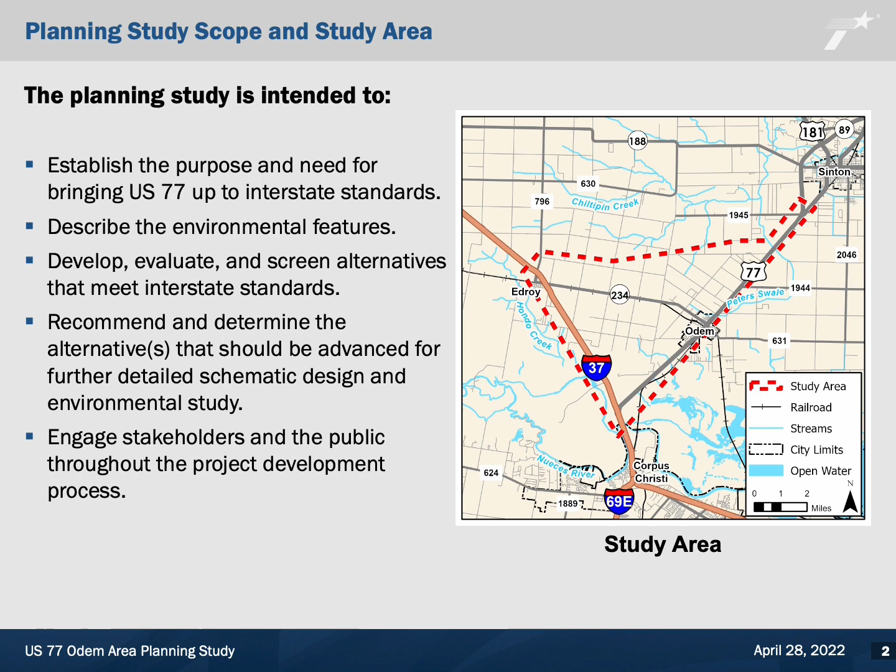You may notice the study area depicted on this slide is fairly large. This is intended to provide sufficient coverage to accommodate the range of alternatives that may be developed to bring US 77 up to interstate standards.

You may be asking, why do US 77 and other highways need to be upgraded to interstate standards? The I-69 system was established through a series of transportation legislation signed into law beginning in 1991. The I-69 system will ultimately extend through Texas up to Michigan, thereby providing a continuous interstate corridor connecting Mexico, the United States, and Canada.

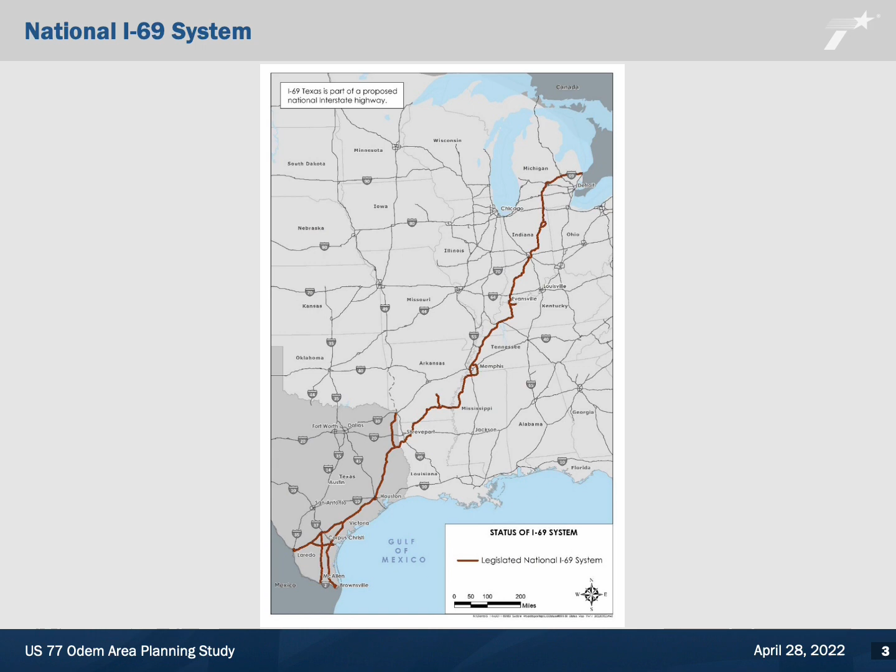The I-69 system in Texas will result in a variety of benefits. It will enhance safety and traffic operations and facilitate the efficient movement of freight. It will address emergency evacuation needs and serve both rural and urban communities. I-69 will also accommodate growth and economic development and provide improved connectivity to multimodal facilities, ports, and border crossings.

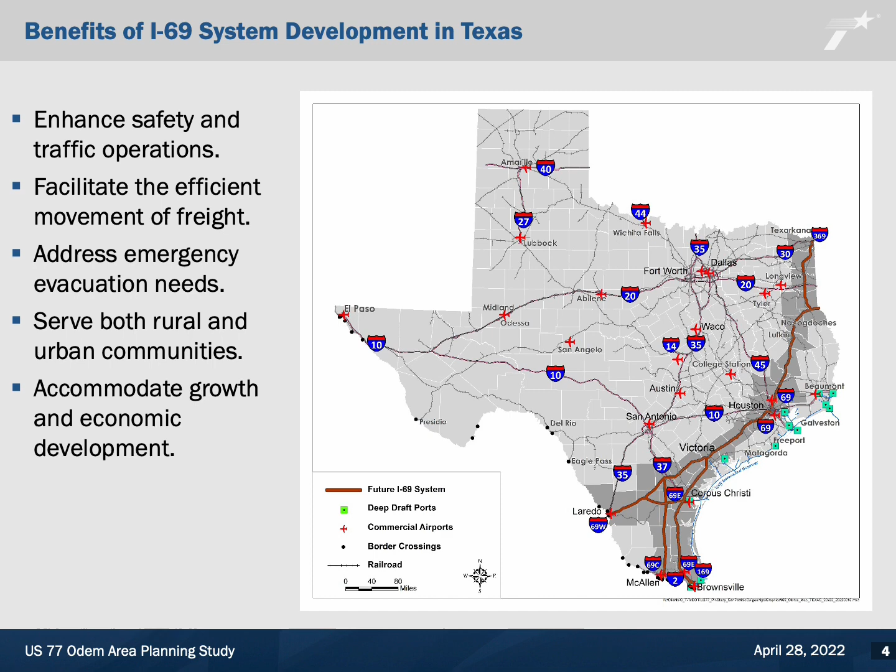US 77 in the Odem area does not meet interstate standards. The US 77 roadway characteristics within Odem include 10 intersections that have stop signs from side streets that allow for turning onto US 77. There are also 3 signalized intersections, 2 at-grade rail crossings, a school zone that drops the speed to 25 miles per hour when school is in session, and a posted speed limit of 35 miles per hour through town.

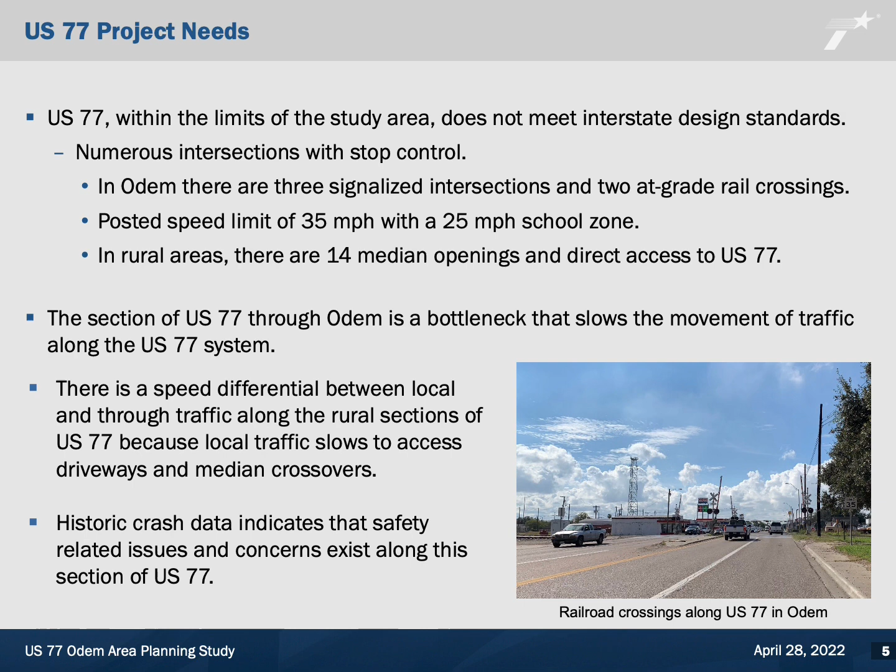The rural sections of US 77 outside of Odem include 11 intersections with stop signs from side streets that turn onto US 77. There are also 14 median openings, some of which have left turn lanes, which allow traffic to cross US 77. In addition, this section of US 77 is a bottleneck, and there is a speed differential between the local and through traffic along the rural sections because of the driveways and median crossovers. Historic crash data indicates that safety-related issues and concerns exist along this section of US 77.

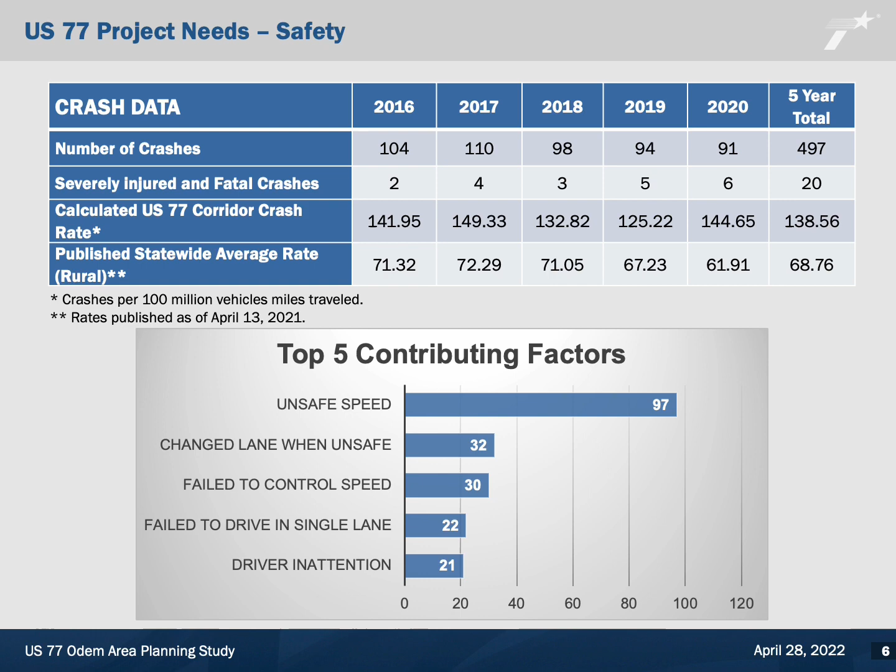Bringing US 77 up to interstate standards will include design and operational improvements that will maximize the opportunity for motorists to recover from driver error and react to unforeseen hazards. It will also reduce the mix of slower local traffic with higher speed through traffic.

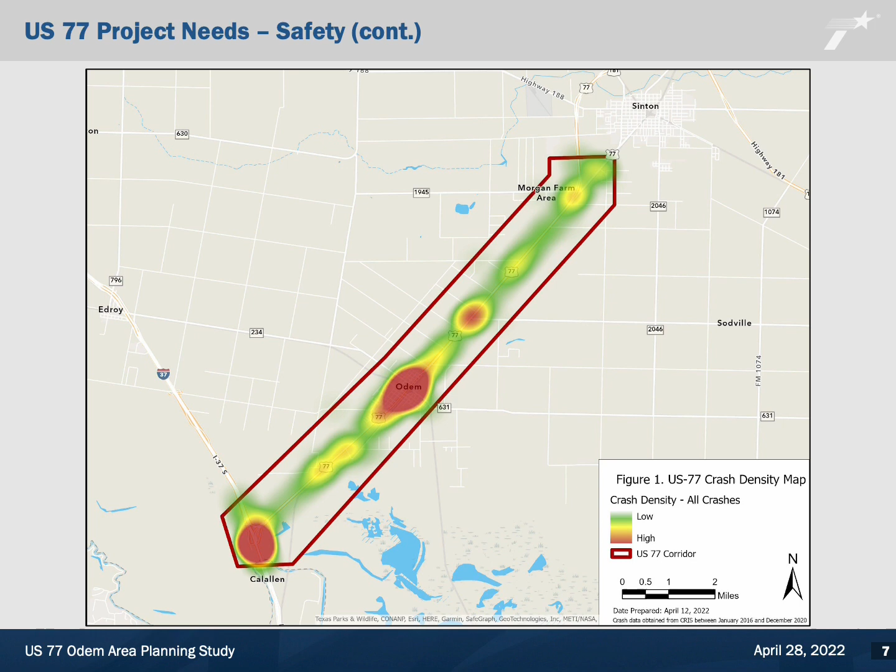In addition to safety, mobility, access, and connectivity are also needs for US 77 in this area. The annual average daily traffic for this section along US 77 ranged between 19,631 and 22,745 between 2016 and 2020. Of that traffic, approximately 13% were large trucks.

The average speed in the area includes a bottleneck in Odem where the average speed drops to below 30 miles per hour to accommodate the in-town traffic. The purpose of upgrading this corridor is to improve through and local traffic mobility while enhancing access and connectivity to serve Odem and the surrounding rural community.

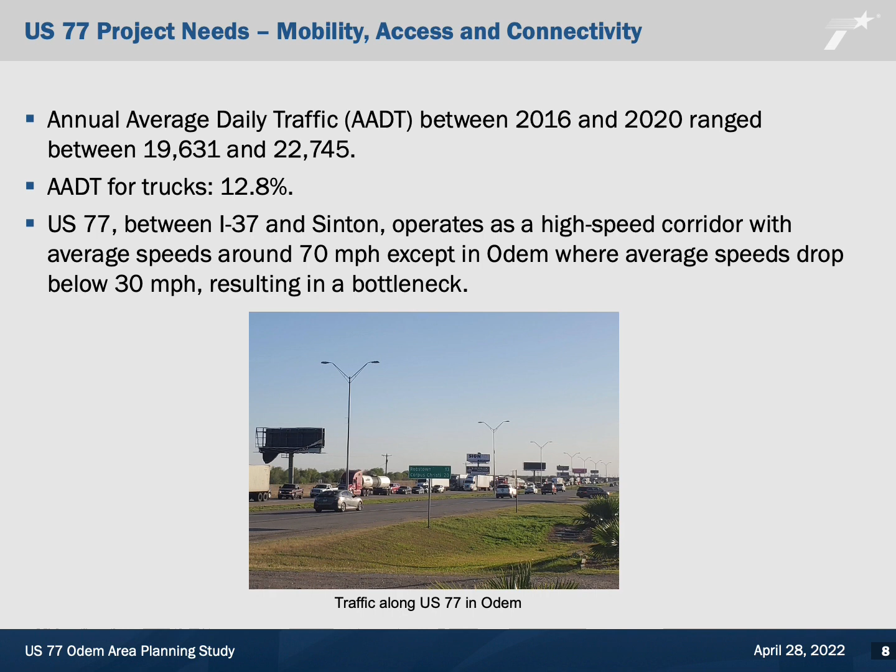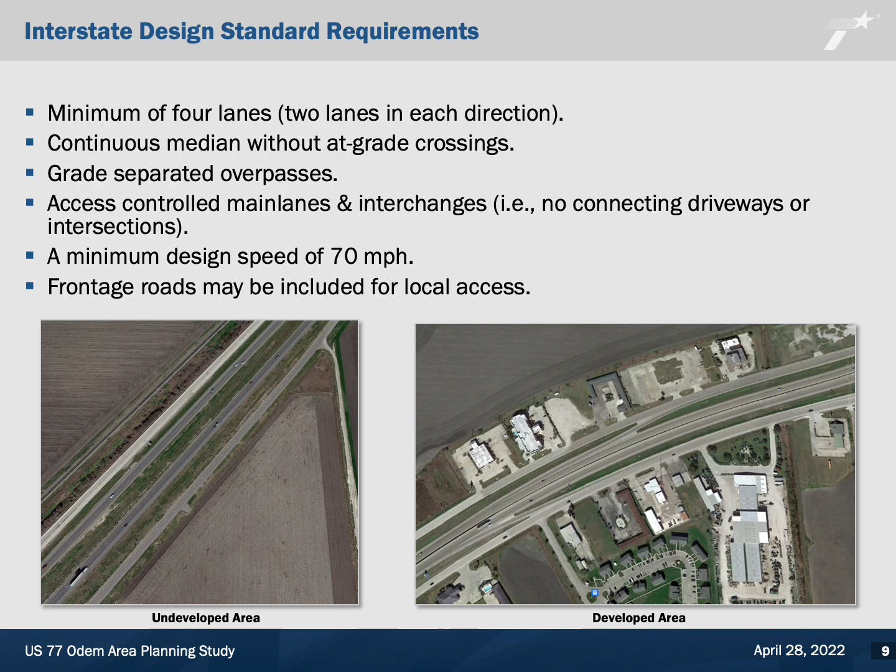As discussed through this presentation, the intent of this project is to upgrade the corridor to interstate standards. These standards include a minimum of 4 lanes, 2 lanes in each direction, a continuous median without at-grade crossings, grade-separated overpasses, access-controlled main lanes and interchanges, and a minimum design speed of 70 miles per hour. Frontage roads may be included for local access. The picture on the left shows the typical section of an interstate for an undeveloped area, and the one on the right, a developed area.

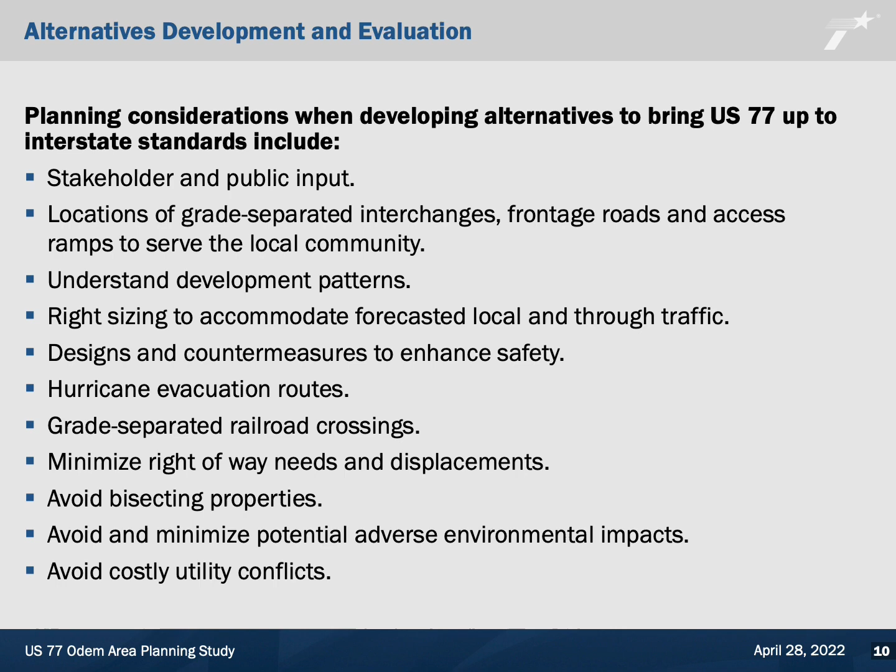There are numerous planning considerations that will be taken into account when developing alternatives to bring US 77 up to interstate standards. One of the most important is stakeholder and public input. Other considerations include locations of grade-separated interchanges, frontage roads, and access ramps that serve the local community, ongoing development in the area, accommodation of local and through traffic, enhancing safety, hurricane evacuation routes, grade-separated railroad crossings, minimization of right-of-way needs and displacements of businesses and/or homes, avoiding bisecting properties, avoiding and minimizing impacts to the natural environment, and avoiding conflicts with existing utilities in the area.

Public and stakeholder involvement is critical to this process. TxDOT has convened a group of local participants identified by local elected officials to act as a stakeholder working group for this study. These individuals will be working with TxDOT and the study team over the next year to help in the development and evaluation of alternatives. TxDOT has also asked the stakeholders to assist in communication with the public and community. Your input, along with that of the stakeholders, will be used to determine the best alternatives for upgrading US 77.

So you may ask, when would something get built? The project development process consists of 4 phases, each involving stakeholder and public engagement. The timeline of each phase noted here are estimates, dependent on funding availability and the improvements to be advanced. We are currently in the planning study phase, anticipated to take 18 months. Following the planning study, if the project proceeds, it would move into the environmental study phase, which includes preliminary design and typically takes 1 to 3 years.

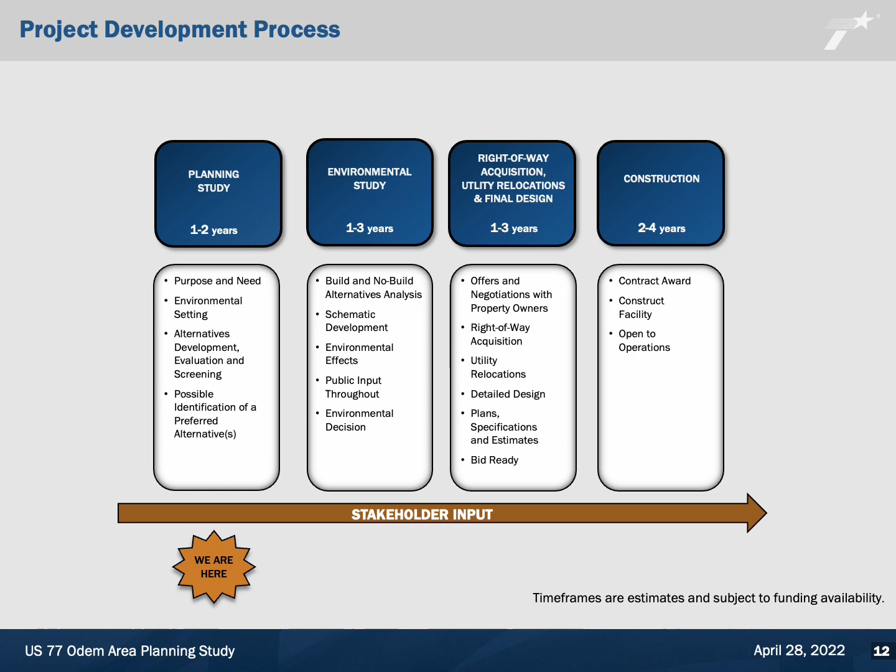Once an environmental decision is made and the build alternative is identified to move forward, the next project phase would involve right-of-way acquisition, utility relocation, and final design. This phase typically takes an additional 1 to 3 years to complete. This is where offers and negotiations would occur with property owners to acquire needed right-of-way, and utility relocations would also occur. Once this phase is completed, the project can move into construction if funding is available. It's important to note that some sections of this 10-mile section of US 77 in the Odem area could be phased into construction separately, which might extend the timeline.

Your comments are very important to TxDOT and will contribute greatly to the success of this study. Comments can be made throughout the comment period and will be included in the open house summary documentation. The Corpus Christi District is asking the public to provide their comments in the following ways: 1. Email your comments to robert.isauci@txdot.gov. 2. Fill out a comment card and mail your comments to the Texas Department of Transportation, Corpus Christi District, attention to Kimberly Amy, at 1701 South Padre Island Drive, Corpus Christi, Texas, 78416. And 3. Comments may also be accepted online by visiting www.txdot.gov, typing Odem Open House in the keyword search at the top right of the TxDOT homepage, then clicking on the Submit Your Comment button on the project webpage.